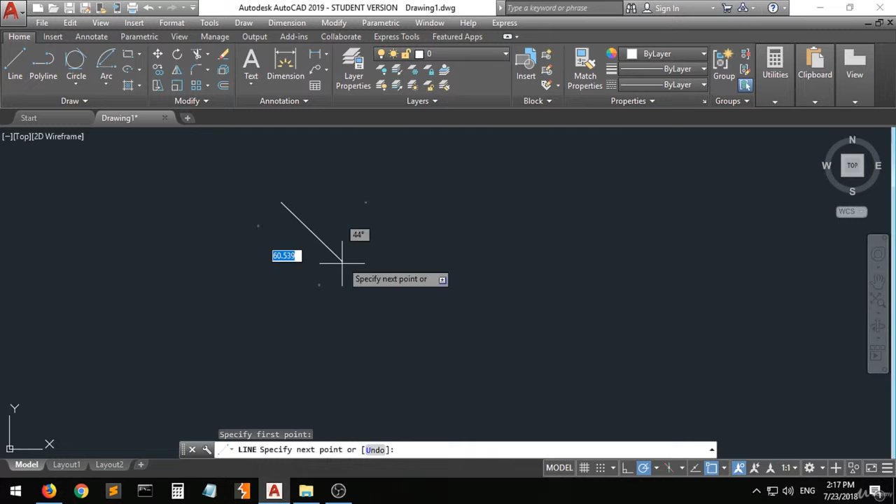First, I'm going to explain the move command. Let's assume we have this shape over here, and you want to move this whole shape from a point to another. Let's assume we have this line, and you want to move this shape from here to another point, or to the end point.

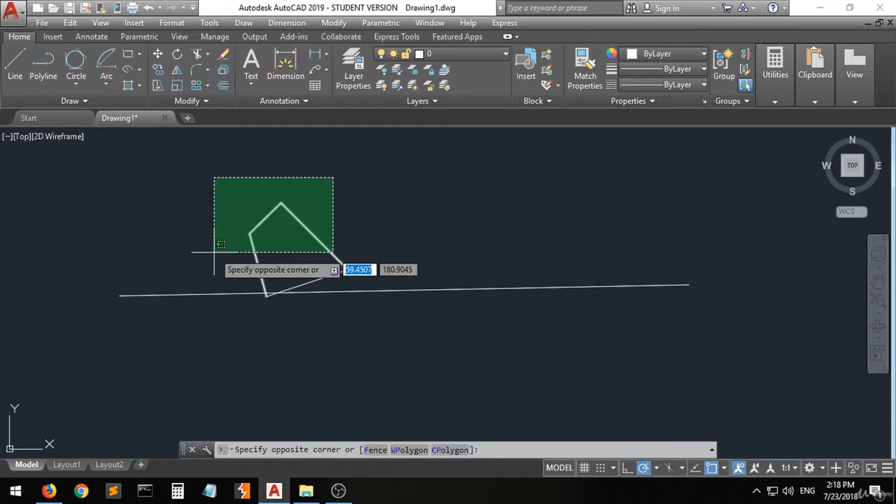If you want to move, you have two ways of doing this. You can do the selection first, select all the shapes, then click on the moving command, specify the point you want to move it to, and as you can see, you can move it from anywhere.

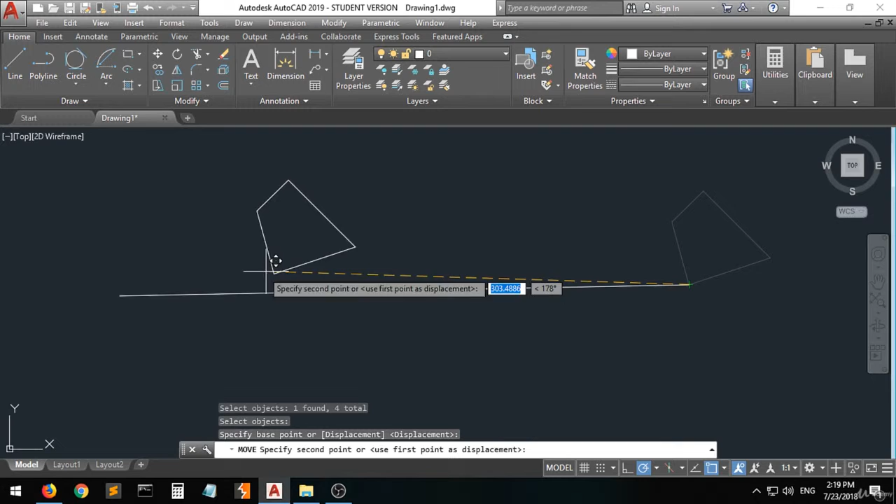We have the other way. You can press the move command, do the selection, then press enter, and specify the point you want to move from here to here. As you can see, it is all the same.

But what if you want to move just this one? You have to activate or select it, press the move button, specify the point you want to move it, and then move it to here.

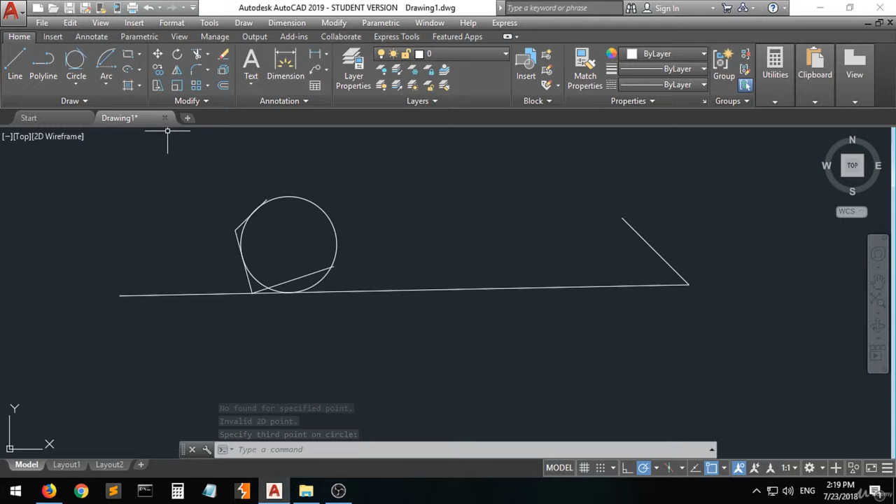See, very easy. Not only lines can you move, you can also move the circle. You can see there is this circle, and you can move it by activating it. You can move it from the center, the tangent, or the intersection. I prefer to move it from this intersection.

I'm going to zoom out using the mouse wheel. You can see that the circle has been moved to this place. So it is very easy for the move command.

Let's go to the rotate command. What if you want to rotate this shape 90 degrees or flip it? You have two ways, as we said: either do the selection first then click the command, or click the command then do the selection, then enter. Okay, we did the selection first. We're going to use the rotate command.

You have to specify, as it shows down in the command line, rotate, specify the base point. This is the base point. As you can see, I can rotate it in this direction, this direction, or this direction - whatever direction you want. I want to rotate it here. See, it is rotated around the point you have selected.

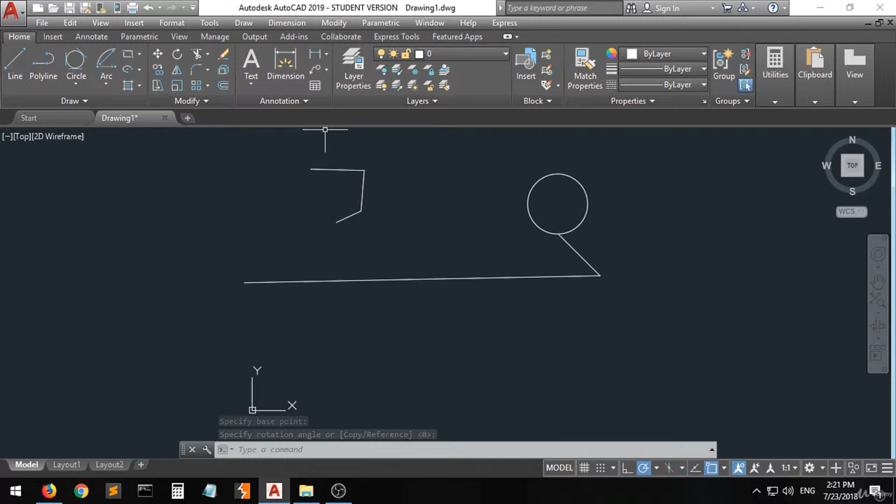There are some other options for rotating, like this. Then pressing enter as we told you, specify the base point as it's telling you - for example, this point. See, we are rotating the shape around the point we have selected. For example, like this. It is very easy, very simple.

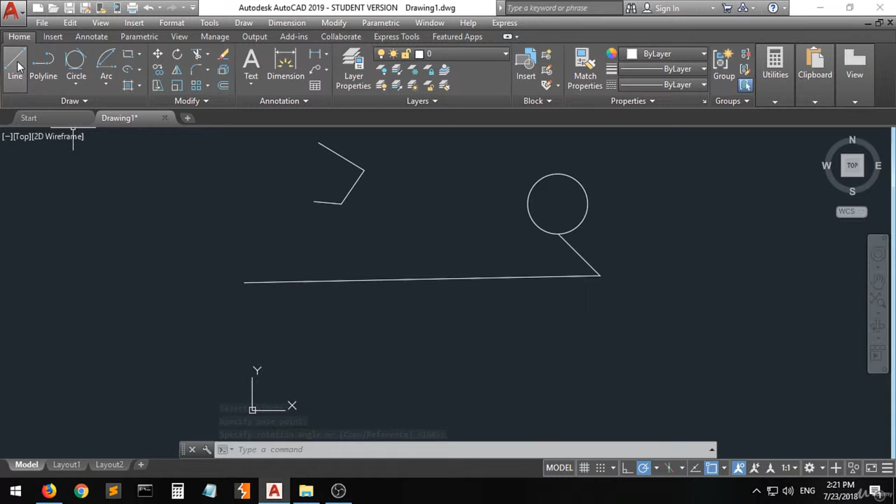Now we have some other commands that I'm going to show you. First, let's draw a line like this, press enter, and then let's zoom in to this.

As you can see, there are some extra lines going out of the shape that we want. I want only this shape, this, and this. I don't want the extra line here, the extra line here, or the extra line here. So if you select it and press delete, you can see the whole line has been deleted.

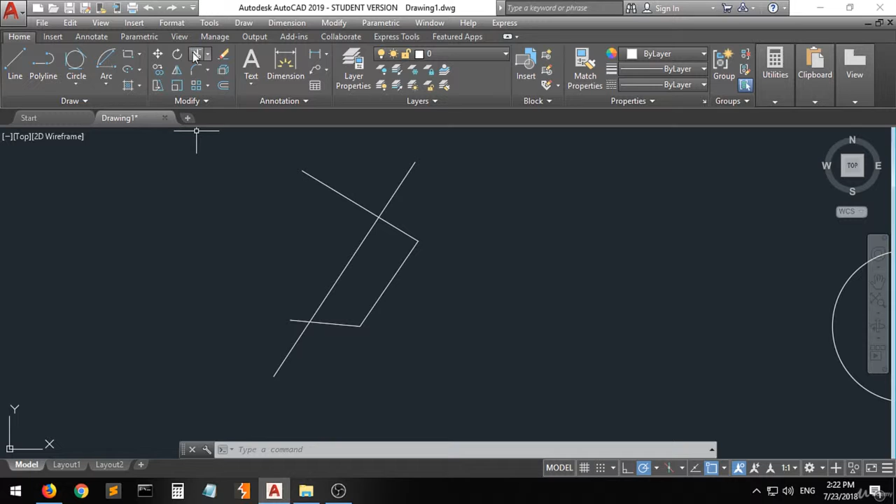Press Ctrl Z for undo. I just wanted the extra line here to be deleted. So what we are going to do is use the trim command. Click the trim command - you have to select all the area or lines related to this line.

So press this, select this area, and then right click. Now, where is the line you want to delete? This line - as you can see, the line you want to delete has been a little bit hidden. Click on it. As you can see, it has been trimmed. Now press enter.

Now we want to trim this line. Again, go to trim, select this area, then right click. I want to delete this line. See, click on it and it has been trimmed.

Very easy. Now again, do it with me. For this line, we have to choose the trim command, select all the intersection area, right click, and then click on this to trim. So you don't have to press enter now.

If you want to trim this thing now, you can do it right away. As you can see, you can trim two lines at the same time - you don't have to redo it again. Enter. So let me show you again and do it together.

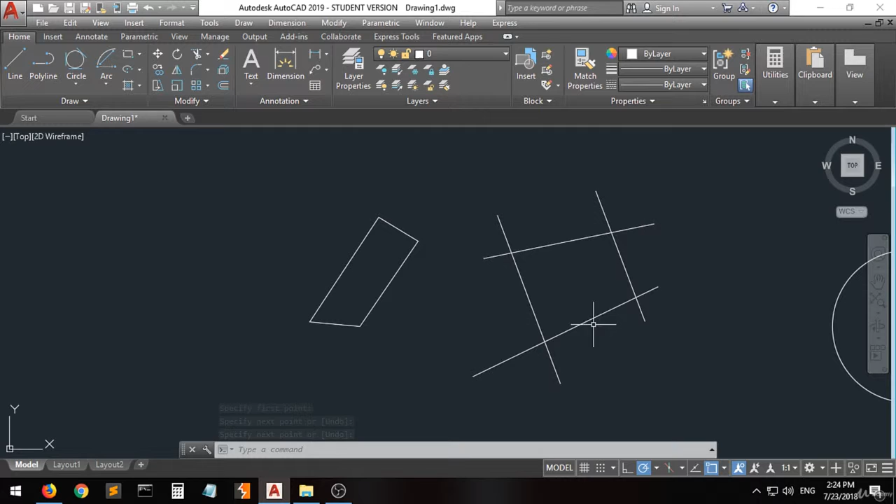Go to trim, select the whole shape, then right click, and now you can trim all those shapes at the same time. You have to select all the lines related with the extra lines. You can also use the selection or box selection.

You can do this, see, very easy. You can click the right click of the mouse. Once the selection box has appeared, choose the things that you want, and then it has been deleted.

Again, you can click it one by one, or one click by the right click of the mouse. Let the selection box appear, select the thing that you want, then choose them. Once you have trimmed all the things that you want, just press enter. See, now we have this shape without any extra lines.

This is for the trim option. We have some other options here. We have the copy thing. Click on the copy, select the shape. As you can see, they are telling you to select objects. Let's see. You can select this line, this line, this line. I want to select this line.

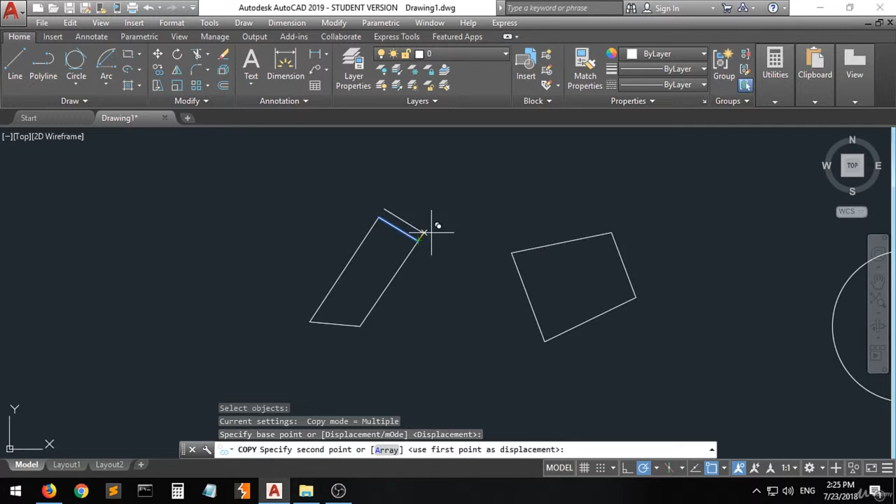Then right click. Where is the base point that you wanna move it from? See, now it has been copied. You can do a lot of copies with one move. Copy, copy, copy, copy. See? Very easy. Now once you're done, press enter.

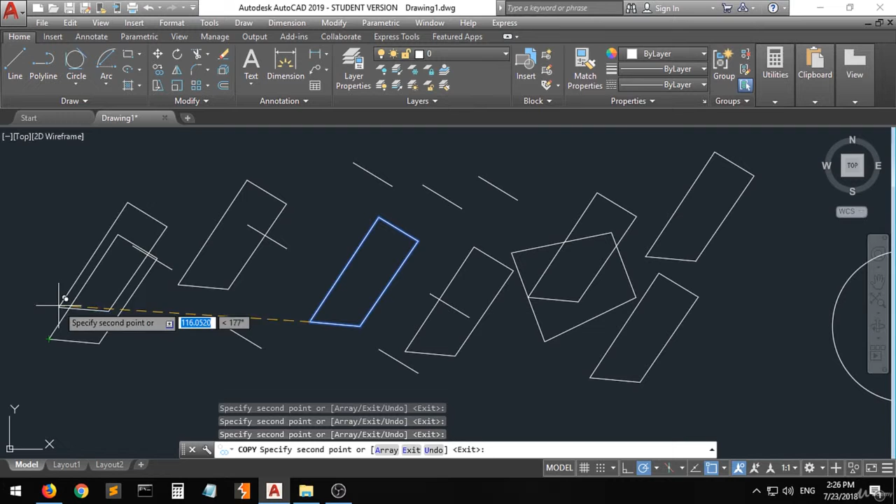Again, if you wanna copy a line, you can do it. And if you wanna copy the whole shape, you can do it also. Click on the copy, select this whole thing, then right click, specify the base point you want to move from. As you can see, you can copy the whole shape. Very easy. Once you're done, press enter, and all the copies have been created.

We have some other things and options. I guess it's a little bit messy now in the drawing space. Let's delete the whole thing here, zoom out, do this, and delete. Let's just draw a circle. Let's go to the center and radius.

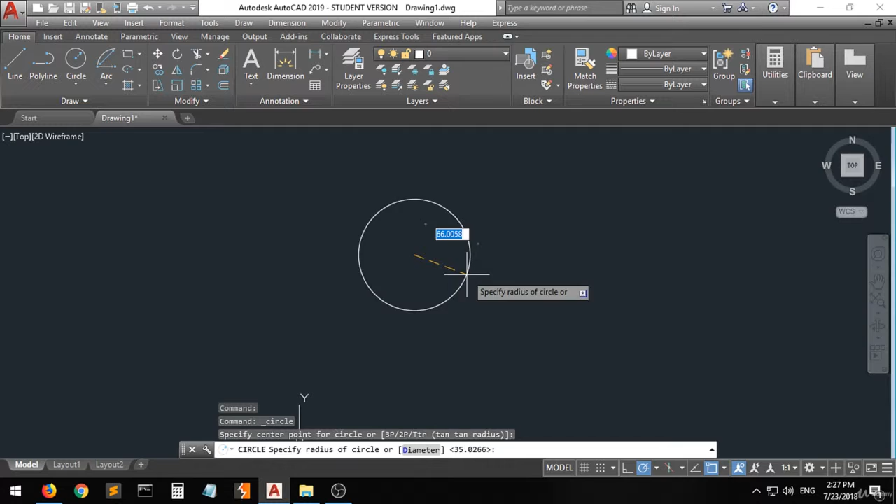What if I want to copy this circle? Or I'm sorry, what if I want to do a mirror thing for this circle? Let's draw, for example, a triangle. And let's delete this.

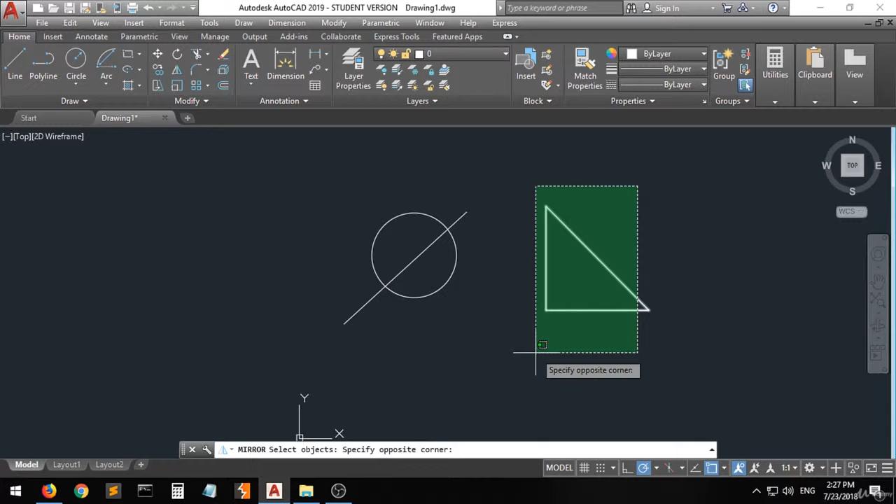Okay, now let's choose the mirror thing. Where is the object? Select the objects that you wanna do the mirror thing for. You can do it for only one thing, one line, or you can select the whole shape. I want to rotate the whole shape, or I want to mirror the whole shape. Enter. Selected. Now do enter or the right click.

Right click. Then they are telling you to specify the first point of the mirror, and by this they mean the line that you want to do the mirror around. I'm going to choose this and this line. You can do it along this line, around this line, around this line, around this line, but I'm going to choose from here to here.

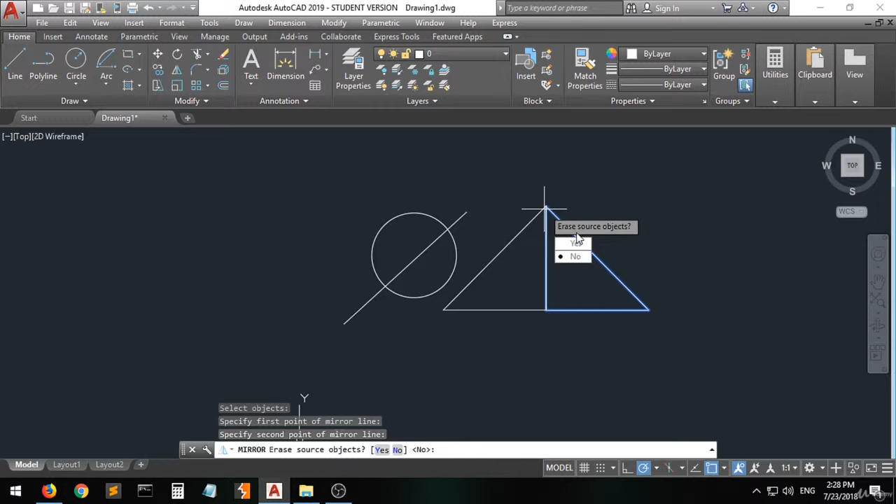Select this point. Then they are telling you to erase the source object. If you want to choose yes, yes. If you want to choose no, no. I don't want to erase the original shape, so no. Now, as you can see, we have this mirror triangle.

Let's do it again with the circle. Choose the mirror. Select the whole shape that you want to do the mirror thing for. Right click and then specify the first point that you want to do the rotation around. I want to rotate it.

You don't have to choose anything on the drawing. You can choose just any line from here to here. Now erase the source objects? No. As you can see, the circle with the line has been mirrored around a line in here between. Very easy. And this is for the mirror thing.

What now? Let's move on to the thing called the fillet. The fillet is something related with making the hard or pointed angles something more round or wavy or curvy, creating curves from this angle. So let's click on it.

Activate the command. You have to select the line that is related with the angle. I want to select this and this. Okay. I'm sorry, I guess it has been disabled. Select these 2 points, select the fillet thing.

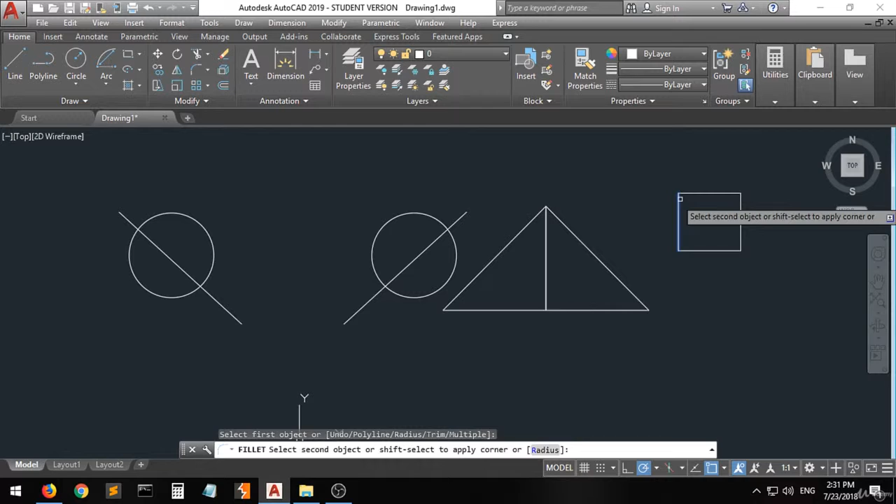This is the first object. Select second object, or shift-select to apply corner. What is wrong? Let's do a rectangle thing. Let's go for the fillet.

I'm sorry, I guess there's something wrong with the program. So I'm going to explain the fillet again. I guess there's something wrong with the software right now, but that's it for all the modifying commands.